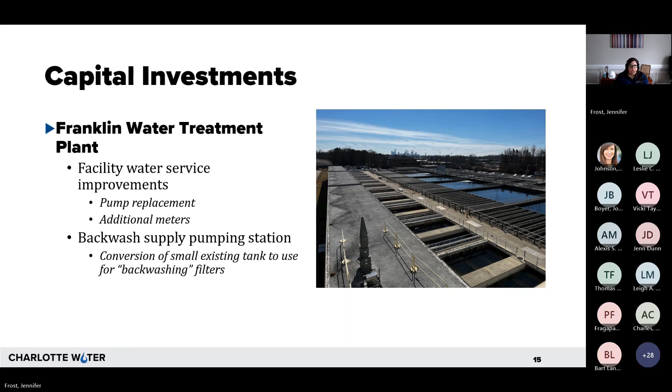All right, I'm going to pivot for a little bit here and talk a little bit about what happens when Mother Nature is not working with us and she's working against us, when things get hot and get dry. And I want to talk a little bit about Charlotte Water's water shortage management plan and the low inflow protocol that our entire Catawba River Basin operates under.

Charlotte Water's water shortage management plan is something that, like for all local governments in the state of North Carolina, is required. This plan is what a utility or local government will pull up and execute when there are times of extreme or exceptional drought. Our water shortage management plan was written in 2003, but it's been updated 5 times since on a regular occurring frequency.

The most important thing about the water shortage management plan is that it aligns with the low inflow protocol, and it outlines the logistics of what Charlotte Water will do when we're observing that low inflow protocol. And it also aligns with our ordinance. So everything is codified through our city council as well.

So these three tools, the water shortage management plan, the low inflow protocol, and our ordinance are all in lockstep so that when there is a drought, when there is a water shortage, we have a plan that we can pull out and execute and know that we're working coordinated with the rest of the basin, which is where the low inflow protocol comes in.

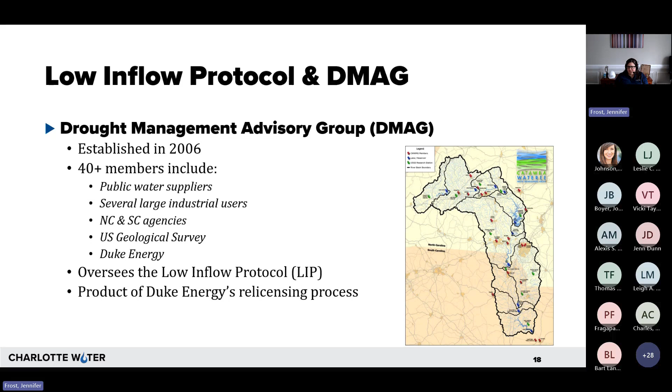This protocol is a drought management plan. It sets conservation priorities for every single user across the basin when there are drought conditions. It prescribes actions so that we're all coordinated, and it outlines criteria for entering and exiting drought stages. This is really important so that we're all in lockstep. There's no ambiguity about what each of our utilities should be doing as we move through these drought stages, and we've all agreed on these actions together.

And of course, the LIP calls for all the members to maintain an implementation plan so that when the LIP is enacted, when that protocol is being implemented, everyone has a plan. And of course, Charlotte Water's is that water shortage management plan I was talking about. So what does the LIP call for?

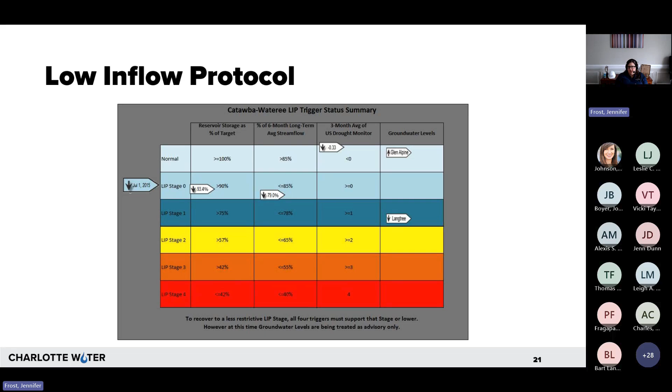It was at 79% of the capacity of over 6-month average of those streams that all feed into the river. So because of those two things, we're starting to move into stage 0. We announced as a basin and enacted the LIP so that all of us would move into stage 0 and then continue to monitor how this is going to change over the next few months. And so every month we would look at the triggers again and decide whether or not we are still in the same stage or escalating into a worse stage.

What happens when we move into those stages? Again, collectively, there are performance goals. And when we get into stage 1, what that means is that each member of the DMAG is going to work to reduce overall water use by 3 to 5%. And the way that we're going to do that is to voluntarily ask our customers, our users, to reduce those discretionary water uses. And as you can see, as you move into different drought stages, the percentage reductions that we're asking for increase. And then some of those water uses move from voluntary to mandatory, and they escalate in who is being asked to do this.

So for example, discretionary water uses. At the beginning, we're going to ask people, voluntarily, can you reduce your discretionary water uses? Those are going to be things like irrigating turf of personal property, fountains, and decorative use of water. Please don't fill or refill your pools and reduce non-commercial car and vehicle washing. That's what we consider discretionary.

Then as we move into mandatory, those discretionary uses become prohibited. And for the community and the business, those uses start to kick in. And we ask, for example, nurseries to reduce the watering that they'll do. We ask commercial car washes to reduce their use, and so on and so forth. And so as we move through those stages, things move from voluntary to mandatory, and more of the community and more of the services that depend on water are reduced until we can meet those performance goals. And the beauty of it is that we're all in lockstep together.

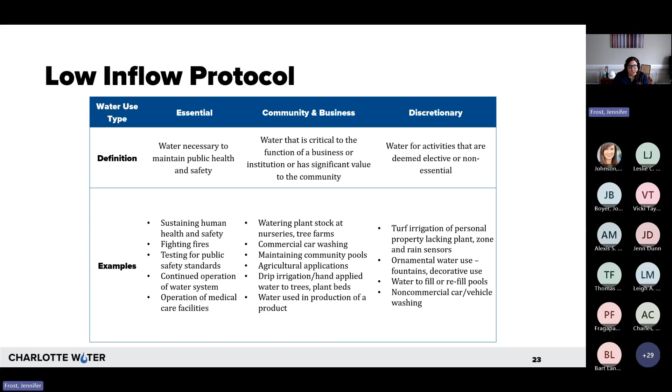In conclusion, what I hope that you've learned from this presentation is that Charlotte Water has a lot of programs in place to minimize water use and loss. Conservation programs are important. They can help with water use, but they can't prevent the need to provide water to different areas of the service system. Conservation is a system-wide program. Charlotte Water's programs ensure sustainable water use as well as conservation during periods of reduced supply. So again, our principles: water use is minimized, water is not wasted. Those are all in effect.

We are glad to be part of the Drought Management Advisory Group. When we all work together, those programs for the low inflow protocol are coordinated basin wide, and they prescribe an escalating set of voluntary and mandatory practices that we all adhere to. That is my content for today.

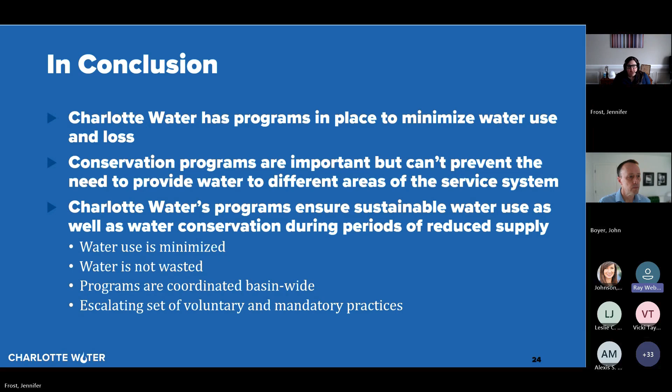Thank you. You're welcome. Hey, the question I have is, when you're in the mandatory drought stages, is there any kind of punitive damage against violators, or how does that happen? Because I've lived in areas where they really didn't care that they were in a drought situation and a mandatory situation, and the county or the water system did not penalize them. I just didn't know what happens at that point, and I've not experienced it here.

Yeah, that's a great question, Ray. The last time we were moving towards those was in 2015, and at that time I was actually overseeing Charlotte Water's drought task force. So as soon as we start to move into voluntary and mandatory, Charlotte Water kind of circles the wagons. We create a task force internally so that we can coordinate within the department, also with our city and our county partners.

And yes, what happens is enforcement. One of the reasons why our water shortage management plan is in lockstep with our ordinance is because our ordinance allows us to enforce those mandatory actions with penalties. There are fines associated with water use. So when we move into restrictions, we communicate that to the customers. We use the media, press releases, social media so that folks are aware that, yes, we can in fact fine them. It shows up on their water bill.

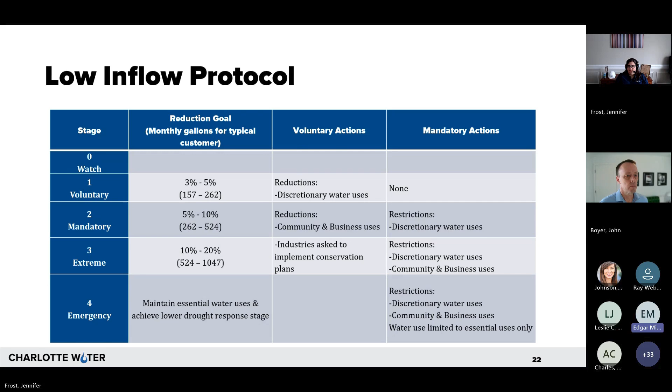Very interesting, particularly discussing the recycled and the reclaimed water. Do you see a large potential for that in the future? What's your sense of the growth in the use of those two technologies? I think that, you know, we had a reclaimed water program. It's dependent on the customers and the customer base that you have, and so it actually was down for a few years and restarted in 2024.

We're excited about reclaimed water. We're really excited about the QC water as well. We're still learning, but one of the things we found when we did this Renew Brew and when we started the reclaimed water up at the university area is that starting these things as pilots gets the conversation going. It allows people to start thinking about other ways reclaimed and recycled water can be used. We've had so many people come out of the woodwork interested in talking about the potential. So I personally am very excited about both of these programs. Having these pilot programs gets the wheels turning to think about what potential is out there.

Jennifer, I'd like to add to that. Edgar, the answer is yes. What I see in the future for Charlotte Water is that we will be doing more of it. What Jennifer referenced in the university area is the Tradition Golf Course and the partnership that we have with UNCC. And so they are going to irrigate using reclaimed or reused water, water reuse, just depending on where you are in the industry. UNC Charlotte came to the table with a significant amount of funding.

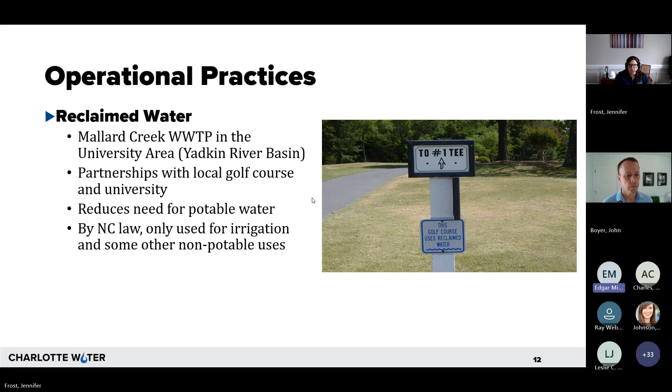Yeah, and then the last question, just from a water quality standpoint, you mentioned the flushing of the lines. What are the water quality concerns that require you all to do that? Bacteria or other things, sediment, turbidity? It's the trihalomethanes, so THMs. That's predominantly it. Those can build up over time in the distribution system, and those are regulatory.

There's a regulatory water quality standard for THMs. So if the water, particularly in the summer, gets too stagnant, those can build up, and that's really where we need that flushing to happen. There is also making sure that we have good chlorine residuals at the end of the system as well.

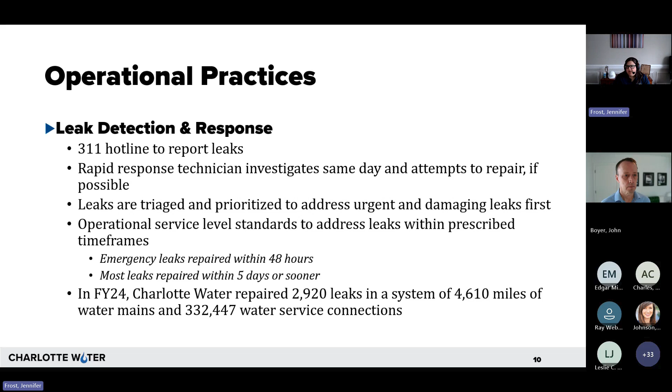I think Cindy Beam had a question. Aaron, if you can allow Cindy to unmute herself. Yes, Cindy should have microphone access. Okay. Cindy, if you have microphone access and you want to speak your question. Can you hear me? Hi, Cindy. Yes, we hear you. Hi. Okay. That was a very good presentation, Jennifer. Thank you for that. I guess I have two

questions after listening to the last gentleman talking about the flushing. Is the water recaptured after flushing? Not at this time. What we try to do is direct it to a nearby creek, a nearby stream. But I will say that there's a lot of optimization going on within Charlotte Water right now, and that is one of the reasons why we do have the auto flushers, to make sure that we are only using them for the time frame that we need.

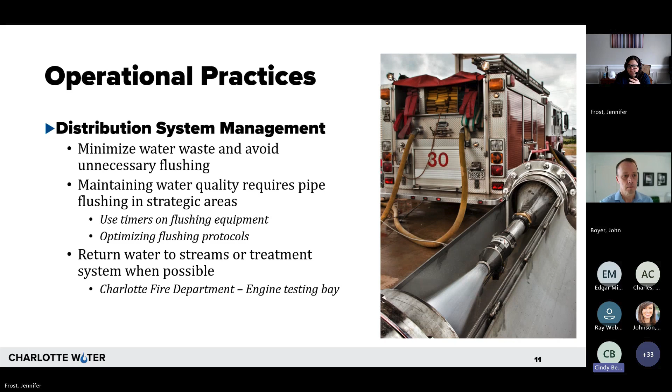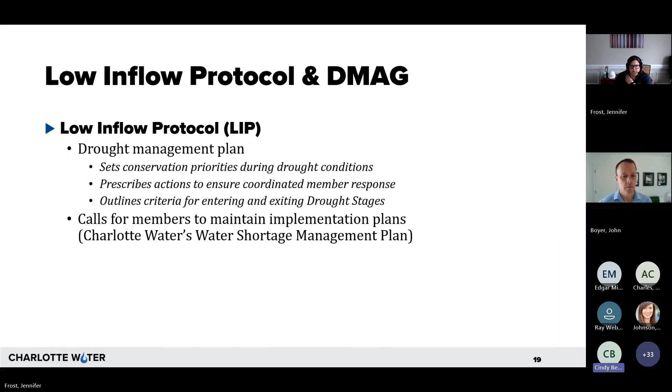Okay. My main question was about when we're in drought conditions. You were talking about during extreme or exceptional drought conditions, what happens. That seems to be sort of reactive to me. In order to be proactive, could we look at doing something during moderate drought, since most of the state stays in a moderate drought situation?

So the word moderate drought and what you're talking about is the drought monitor, and that is incorporated into this. You're right. As we move into those different drought monitoring stages, that is considered as one of the triggers for the low inflow protocol. But I think those kind of conversations, we can continue to talk through the stakeholder advisory group process too. Okay, thank you.

Jennifer, Don had a question in the chat. His question was, are there any standard metrics that water utilities use to measure conservation? Something like gallons per capita. We'd be interested to know how Charlotte Water and its users stack up to other utilities and communities in the U.S. You know, I don't have that information in front of me today, but I think what we can do is make a note of that so that I can bring that back to the stakeholder advisory group. Sure. All right. It's a great question.

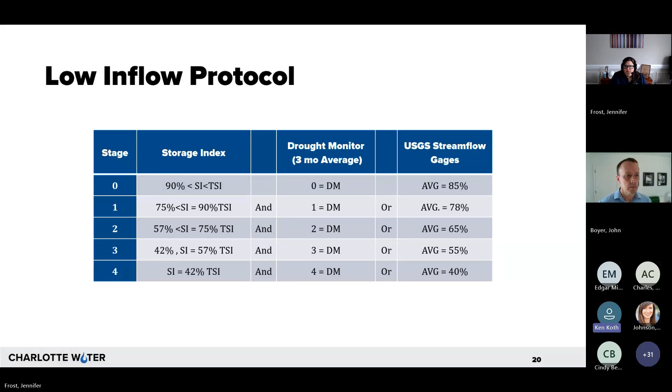And then Ken Koth had a question. Aaron, if you can allow Ken access to his mic. Can you hear me? Hi, Ken. The question was about the cost structure for water. You mentioned having a separate meter for irrigation. Is the cost of water for irrigation and the cost of just regular potable water the same, or is there a difference there?

Irrigation meters have different, the cost is still the same, the volumetric, but if I remember correctly, the irrigation meter is capped. I'm wondering if anyone else from Charlotte Water remembers that, the irrigation meter. I think what happens is it starts at tier 3. Maybe it's not capped, it starts at tier 3, but it's the same volumetric unit price. Let me get that information back to you so I'm not giving you the incorrect info.

But irrigation meters are required for irrigation systems that are installed today, and there is a pricing protocol for irrigation meters. So let me make sure I have that, and I'll bring that to you at the next stakeholder advisory group. Okay, thanks.